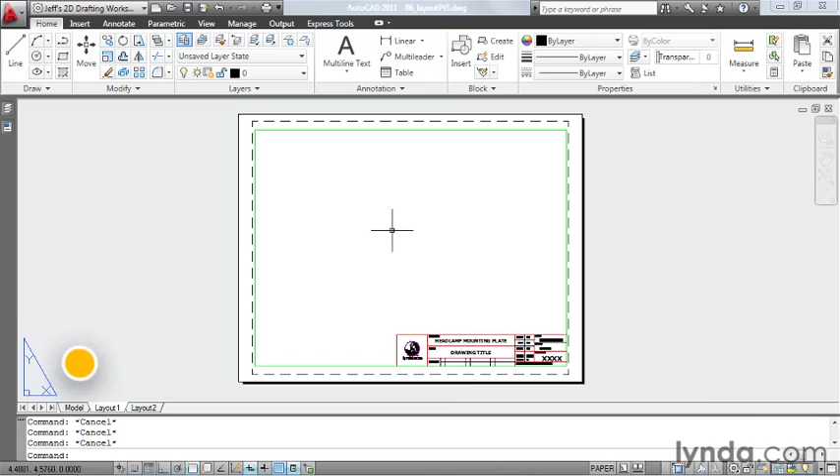Now that we've added a title block to our layout, we're ready to finalize our settings and create a viewport such that we can see our part and set it to a measurable scale.

First, let's take a look at the geometry in this layout. Notice the geometry is displaying using the layer colors. Wouldn't it be nice if our layout displayed just like a plot preview? Let me show you how we can do that.

I'm going to right-click on the layout name, then select Page Setup Manager, and then Modify. Now, we've already taken care of these plot settings ahead of time. Let's take a look at the plot style table. I'll open up this menu and select the monochrome pens.

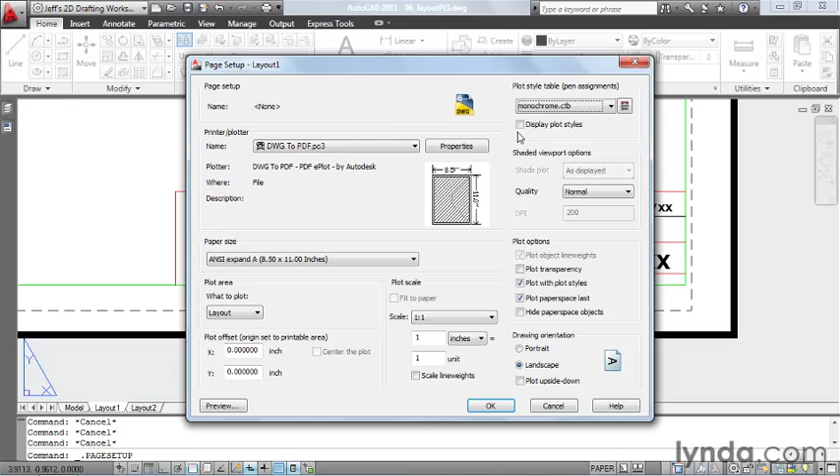Notice that since I'm using a layout, I have the option of displaying the plot styles. I'll turn this feature on, click OK, and close. Now my geometry is displaying using the colors in the plot style table.

We can take this concept even one step further. Maybe I'd like to see my line weights as well. I can do that by adjusting a mode setting in the status bar.

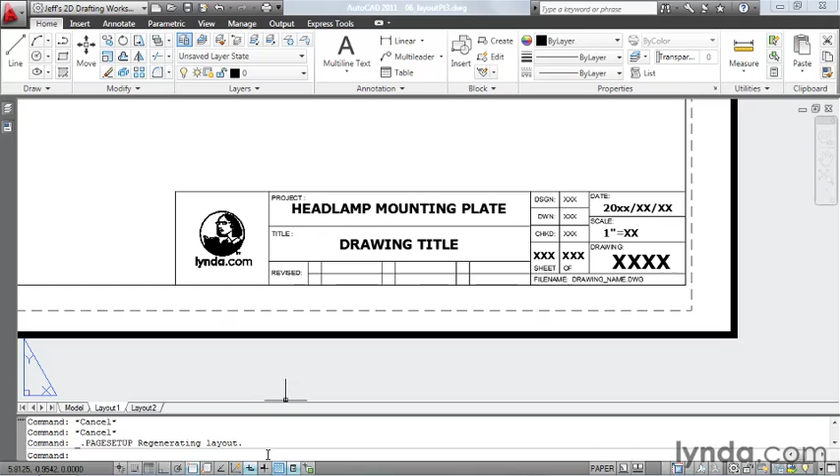I'm going to come down and click this toggle. This controls the display of the line weights. When I turn this on, we can see the line weights in the drawing, and now I am truly able to work in a plot preview style mode.

At this point, you may be asking yourself, where is our part in relation to this layout tab? Let's take a look. I'm going to come down to the lower left and click the Model tab. This returns me to Model Space, where my part geometry is located. Notice Model Space looks a little different now because our line weight toggle is turned on.

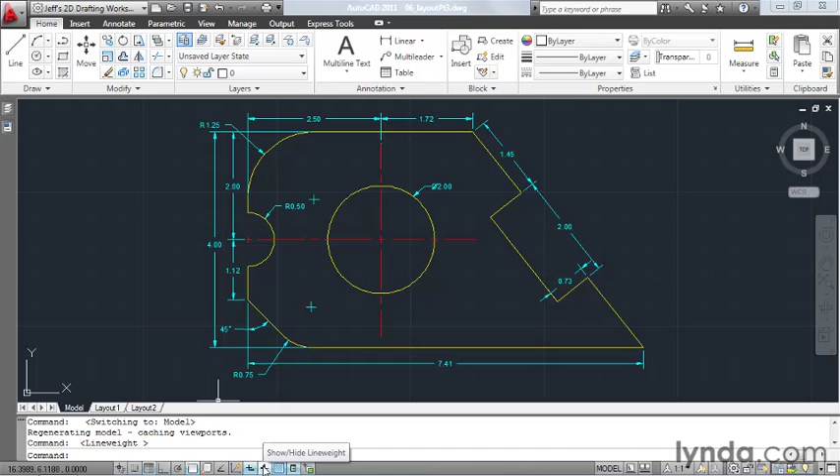If you find the display of the line weights to be a problem, you can always turn them back off. The line weights will plot just fine whether this toggle is turned on or not. I'm going to leave mine on, and then I'll return to the Layout tab.

Layouts sit on top of Model Space, so if I want to see my part, I need to cut a hole in this layout. This hole is called a viewport, and if I'm going to create a viewport, I need to put it on a layer of its own.

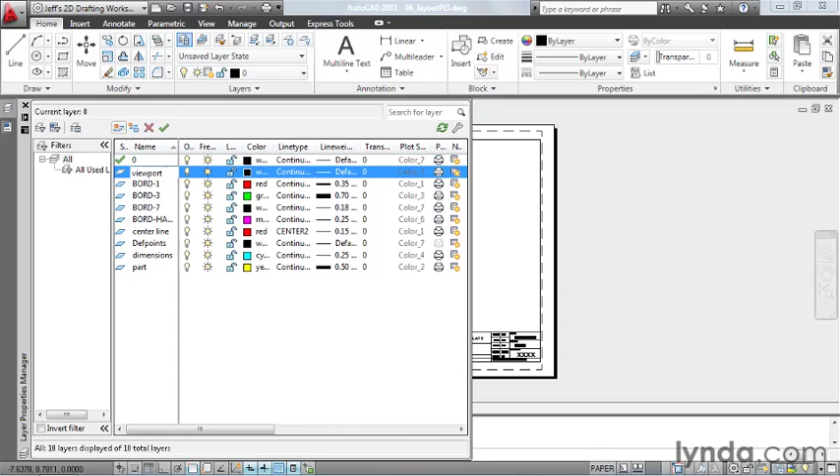So I'm going to open up the Layer Properties Manager and click the New icon. I'll call my layer Viewport, then click the green check to set this layer current, and return to the drawing. To create the viewport, I'll click the View tab, and the tool I'm looking for is down here in the Viewports panel.

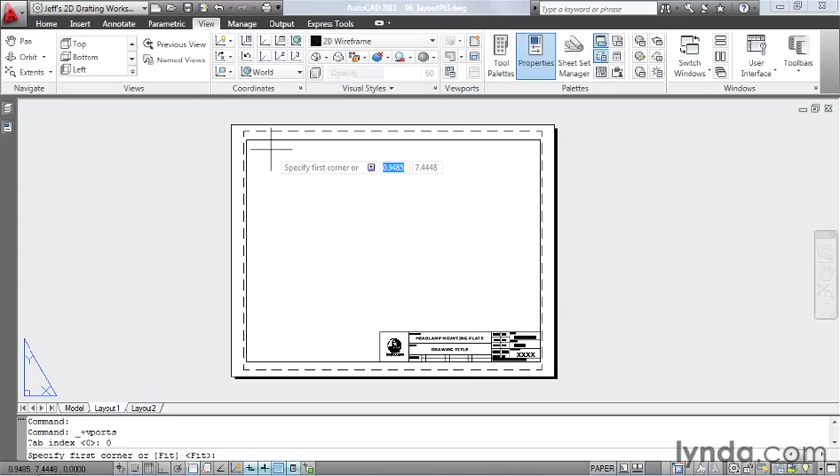Launching this command is essentially three clicks. I'm going to click New, then Single, then OK. Now I'll pick two points to define the rectangular shape of my viewport. I'm going to select the endpoint here and the endpoint here.

Notice we can now see the part through this viewport. A viewport is a lot like a window into model space. Watch this: if my cursor is inside the viewport and I double-click, AutoCAD gives me access to model space through the window. From here, I can pan, zoom, and even work through this viewport. It's a lot like reaching your hand through a window.

In fact, we'll adjust the plotted scale of this geometry by adjusting the zoom factor. Now, I don't have to do that manually.

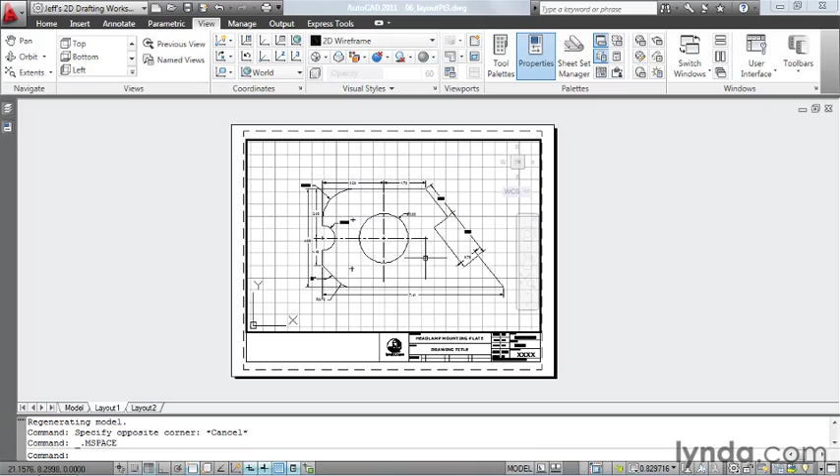Instead, once I'm in the viewport, I'm going to come down to the Viewport Scale menu, and I can set the scale from here. Notice that I have several of the standard engineering and mechanical scales at the top of the menu, and I have several architectural scales down here at the bottom.

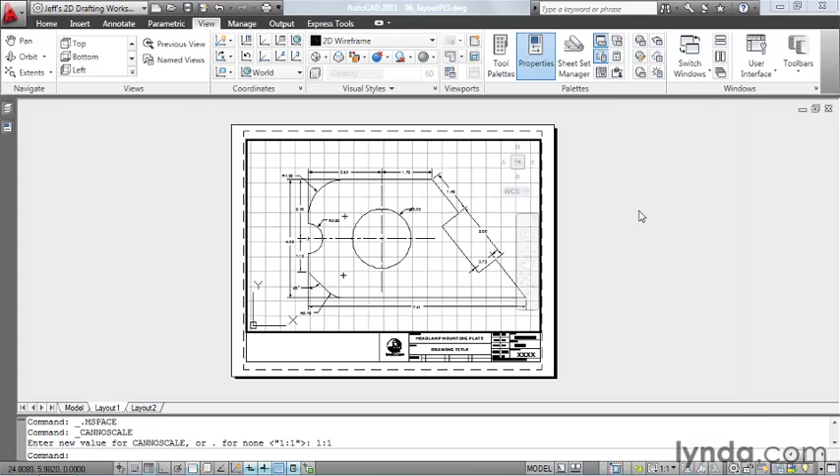Let's see if this drawing will fit in the viewport at a scale of 1:1. It looks like that will work nicely. I'm going to pan this over and center it a little better in the viewport.

Once you finalize your viewport, it's a good idea to come down and click this padlock to lock it. Otherwise, if you accidentally roll your scroll wheel, you'll change the scale of the viewport. And you might think that you could roll the wheel back to fix this. Unfortunately, it never works. The only way to correct the scale is to come back to the Viewport Scale menu and reselect the scale from this list.

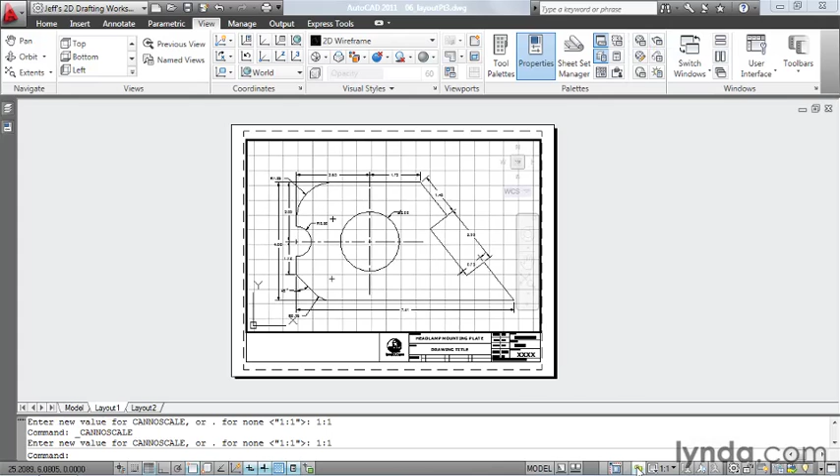Now that I've set my scale, I'm going to come down and click this padlock to lock it. And from now on, if I pan or zoom in the viewport, AutoCAD is going to pan and zoom the entire layout. If I'd like to jump out of the viewport, I'm going to move my cursor outside the viewport boundary and I'll double-click. Now my cursor is back on the Layout tab, and I have access to all of the layout geometry and objects.

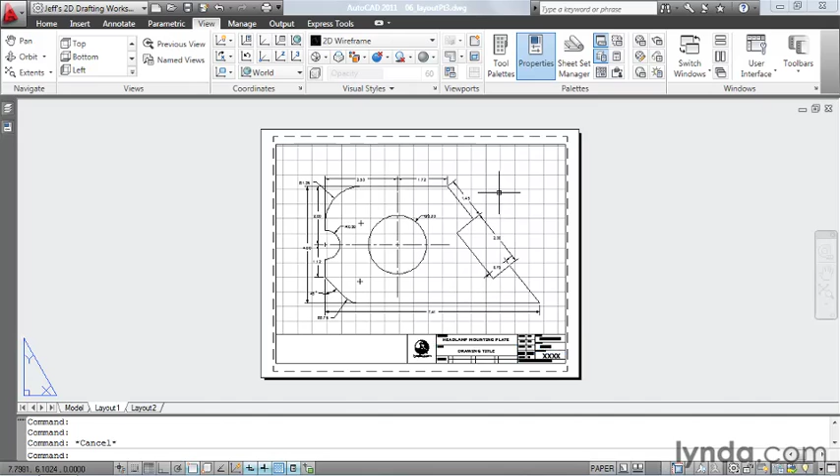I would like to do one more thing. In keeping with my plot preview analogy, I'd like to turn off this grid. This grid is coming from Model Space, and it really doesn't benefit me that much on the Layout tab, so I'd like to turn it off.

To do that, I'll double-click to jump into the viewport, and then I'll come down to the status bar and I'll click the grid toggle to turn it off. And it will be turned off in this viewport only. When I'm finished, I'll double-click outside the viewport boundary to jump out.

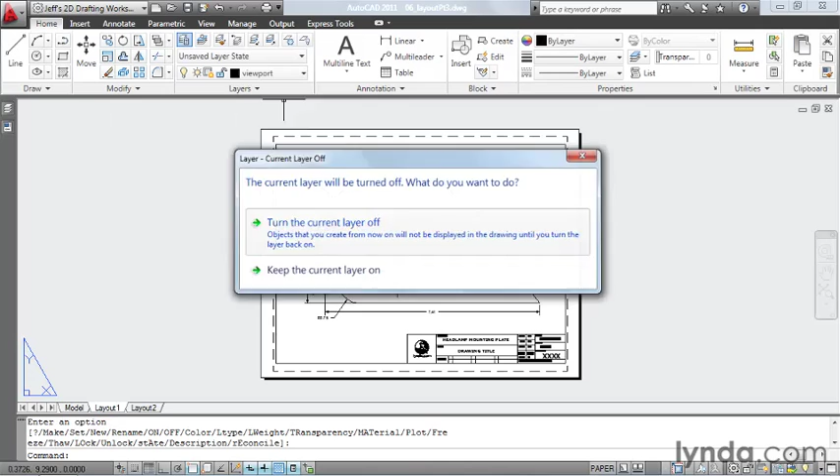Now, remember when I created my viewport, I put it on a layer of its own. You may be wondering why that's necessary. Let's take a look. I'm going to go to the Home tab, and if I turn off the viewport layer, notice that the rectangle disappears and I don't have to worry about this viewport showing up on my plots. That's why it's a good idea to put it on a layer of its own.

Now I'd like to do one more thing. I'd like to rename this layout. Layout 1 is kind of generic. To change the name, I'll double click on it and I'll call this Final Design and I'll press Enter.

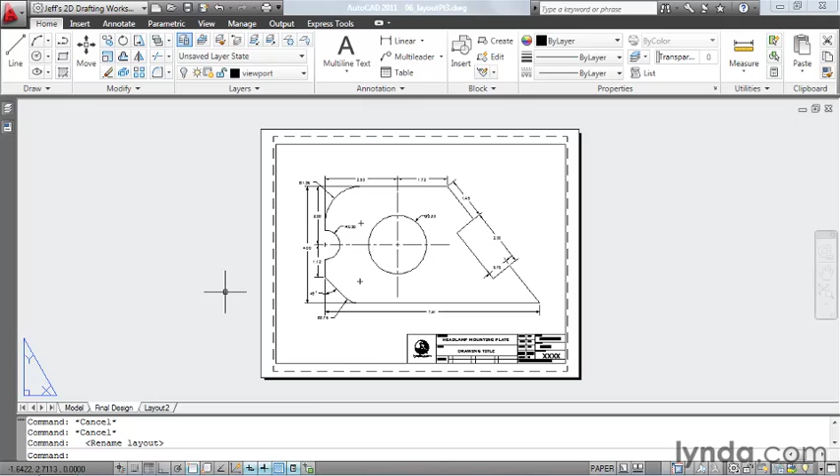When the time comes to plot this layout, remember that all of the plot settings have been taken care of ahead of time. All I have to do to send this to my printer is click Plot and OK. And since I'm plotting this to a PDF, I have to give it a file name. I'm saving this to my desktop, and I'll call the file Final Design, and I'll click Save.

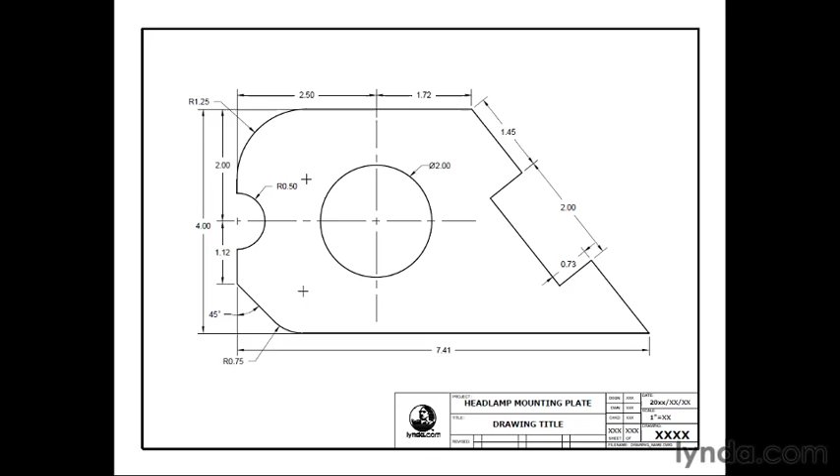On my screen is an example of the final plot. Layouts are the most powerful way of creating plots in AutoCAD. Their benefits even go beyond the viewports, plot preview, and naming features that we've seen here. If we can incorporate layouts into our workflow, we've taken the first step towards using even more powerful features like sheet sets, page setups, and publishing.